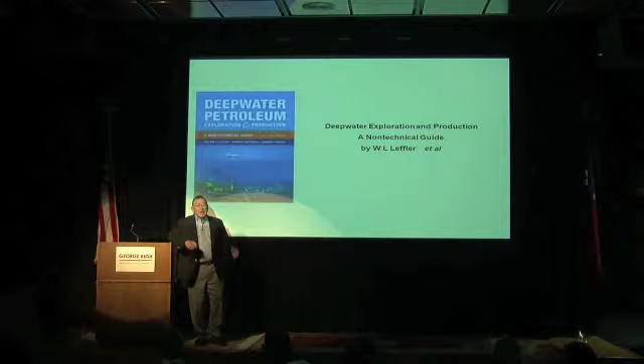I wanted to write a book entitled The Third Wave. So I got two other authors to go along with me, and we wrote the book, published the first edition in about 2002, published the second edition in about 2008, and sent both off in sequence to the publisher. What they did, of course, was change the title to Deep Water Petroleum Exploration and Production, a Non-Technical Guide, by W.L. Leffler et al. Well, Al is not here tonight, so I get to give a talk called The Third Wave. So we're going to be talking about that today.

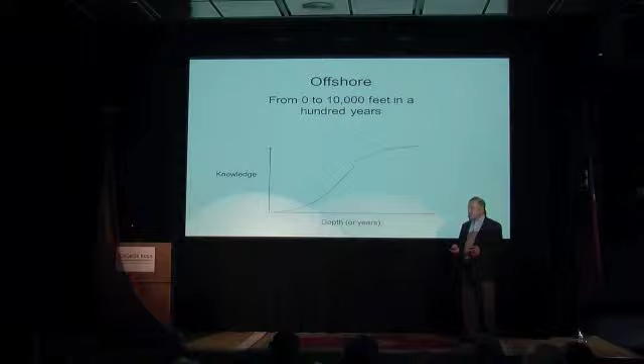But the theme of my talk tonight is going to be the learning curve, because that is the notion that I think describes what has happened as the oil industry went into the offshore. Knowledge on this scale, depth or years on that scale, and like many other learning processes, starts off slow, accelerates, and increases very rapidly. And then you've learned almost everything there is to learn about that subject, and it kind of tapers off. I'll talk to you about where we are on that learning curve in the offshore.

I want to start 100 years ago, a little more than 100 years ago, when the first toe went into the water by an oil man, a fellow named H.L. Williams, who was a spiritualist and sometimes wildcatter in Summerland, California, a town that he founded. He noticed there were oil seeps near the beach, and so he followed those oil seeps all the way down to the water and decided it may be a prospect that he wanted to develop. So he started to build piers out into the water. Some of them went as far as 450 feet out into the water, but it was still only 30 feet deep. And then he would go out and set a casing down there and pound his way down about 450 feet again.

And then he found oil. He did this about 40 or 50 times. The largest of the wells that he was able to produce produced about 75 barrels a day. The average was about 2 barrels a day. After he played that field out, after about 10 years, he decided that was enough, and he walked away from it, leaving all the equipment and oil on the beach because of the equipment leaking and so on. A number of other entrepreneurs did the same thing, maybe 20 or 30 of them further on up the beach. It's no wonder that California doesn't really look all that excited about offshore development in the Pacific Ocean.

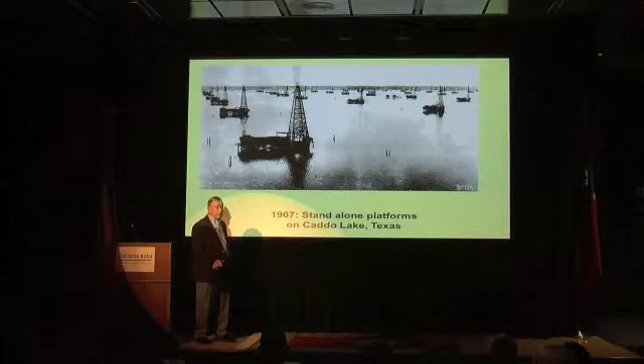He went back to Gulf, back to Mr. Mellon up in Pittsburgh, and said, I think we have a big find. Sure enough, they dragged a whole bunch of equipment up the Mississippi and the Red River and built all these platforms here and produced about 80 million equivalent barrels of oil and gas out of that find. But it was the first time we had a standalone platform in the middle of the water.

I'm going to jump forward about 40 years to 1947, when Superior Oil decided that, after doing some seismic work offshore, they ought to drill an exploratory well in the Gulf of Mexico, about 40 miles out. It was still only about 35 feet deep at that point.

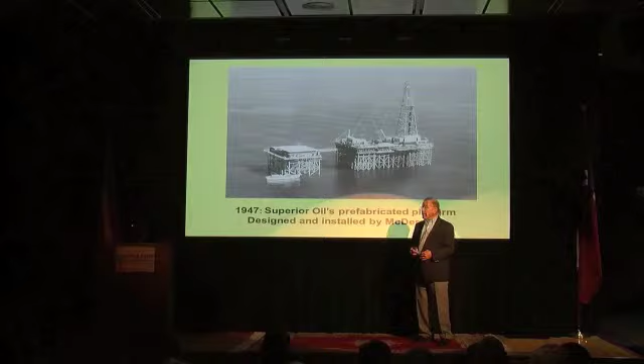But they said, building something out there would not be all that easy to do. Why don't we build this platform onshore and drag it out there, set it down, and drive some piles in to put it in place. That was the first time they built an exploratory well out from a land site.

Unfortunately for them, right down the coast was an operation done by Kerr McGee, and they had a little bit different attitude towards building. They also fabricated something onshore and dragged it out, but it was only about a fifth of the size of the platform that was built here by McDermott for Superior.

What they had was a big tender, which turns out was a surplus LST from World War II. They had all the equipment that they needed to do the drilling over there, and the drilling rig was just on this little tiny platform.

Unfortunately for Superior, this little operation grabbed the brass ring before they did, and they were the first oil produced in the Gulf of Mexico out from a land site. That was in 1947. They beat these guys by about 3 months, but they got the brass ring.

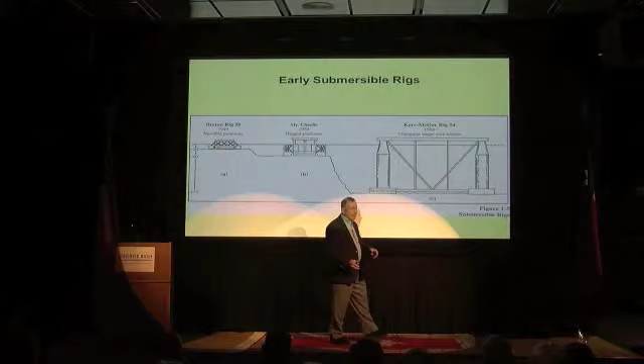When you go to drill an exploratory well, if you build a platform like that, you drill it, and if you find something that's fine, you can produce there. But if you want to drill another exploratory well, you've got to build another platform. So the oil industry thought about that and said, what we need is something where you can pick it up and move it someplace. That's when they started to think about submersibles.

One of the first submersibles that was built was the Breton Rig Number 20 in 1949. What that rig did was have pontoons on the side that were raised up, and this pontoon here was raised up, but you drag it out, and then you would start to ballast those until they actually sat on the ground. As they sat on the ground, you would lift that platform, so the platform was always above the water, and then you would have your drilling rig on top of that. That was the first mobile offshore drilling unit that got put into service.

Mr. Charlie, another one that came a couple of years later, had hinged pontoons on it. The difficulty here was making sure that when it settled down, it didn't tilt and destroy the integrity of all the works that were hinging everything going down. So this pontoon here would hinge all the way up here, and this one would hinge all the way up there.

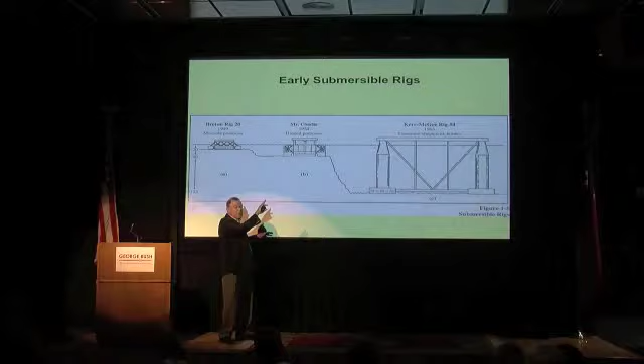And the way they got that on the bottom—here we're talking about 40 feet getting it down—it would be like an old man getting into an automobile. He'd get that part in first, right? So what they would do is lower this pontoon down on a tilt, and when it hit bottom, they'd have leverage to fill up the other pontoon and get that one down too, while the drilling rig stayed on top.

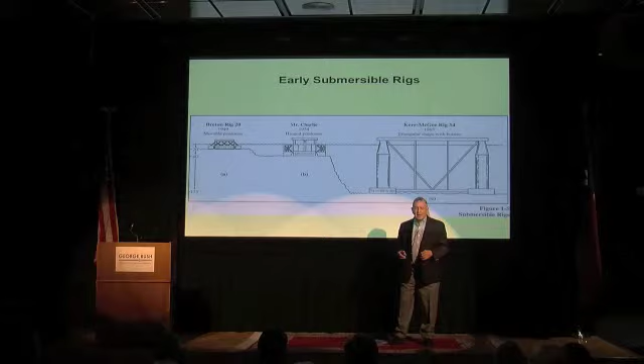It wasn't long before Kerr McGee said, we ought to be able to build something where we could go much deeper than just 40 feet—we need to get into 100 or 150 feet or even more. So Kerr McGee built one of these, a triangular shape with big steel bottles on it. While pulling it to another place, they'd deballast these bottles and everything would float, and that worked just fine. But they were very expensive to build because there's a lot of steel in those things, and difficult to move around, and not all that steady in a rough sea.

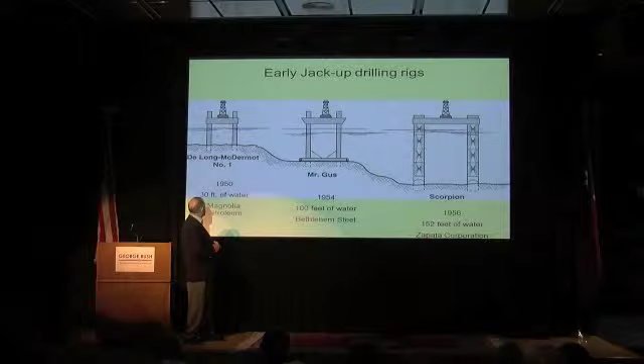So along comes a couple of people talking about maybe we need to not have those big bottles around anymore, but instead get the platform out there and drop something down so we'd have a firm place to do the drilling. DeLong had one built by McDermott, and they could go into 30 feet of water. They had this bottle here, and while pulling it, these bottles were way up in the air like this—they could pull it out and then crank down those big bottles and sit it down there. They'd have a nice stable place to do it.

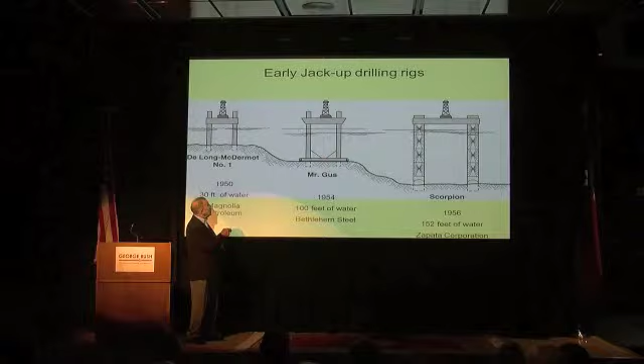So they could actually get into deeper water, as Mr. Gus did—he got into 100 feet of water because this bottle could be dropped way, way down. This actually wasn't a jack up, this was a jack down, because this bottle, while they were floating around, was right up against the platform itself. That one lasted about 2 or 3 years.

On one occasion, as they were dropping that jack down, one of the bottles started to crater, and it tilted over. They took it back and fixed it and brought it out again, and it actually capsized when they got all that stuff in there, and they lost interest in doing jack downs anymore. They said, maybe we ought to stick with jack ups. That's when the Zapata Corporation came along and had a novel rig offered to them by a fellow named...

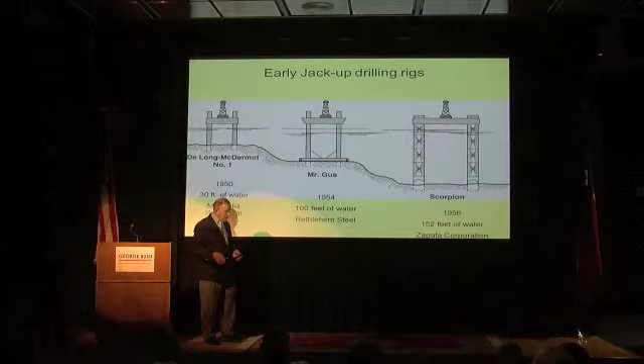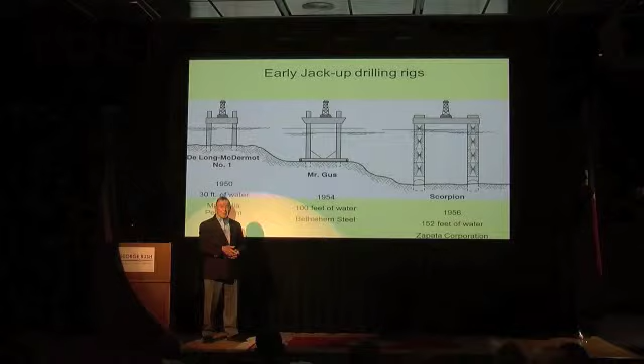Letourneau. That's it, R.G. Letourneau. Letourneau had worked half of a career in the earth-moving business, and he knew a lot about machinery. So what he designed was a rig that didn't have these steel bottles, but had a lattice on it, and you could crank those up and down because they used a rack and pinion kind of operation. Matter of fact, there's a model of one that looks very similar to that somewhere in this building.

They called it the Scorpion, and he started to peddle it around. Couldn't find any of the major oil companies that wanted to use it. But he did find one very aggressive independent called Zapata Corporation, and they said, yeah, we'll try it out. Sure enough, they tried it out, brought it out, and were able to drill in 150 feet of water. Matter of fact, I've got a picture here of the guys who were on that rig.

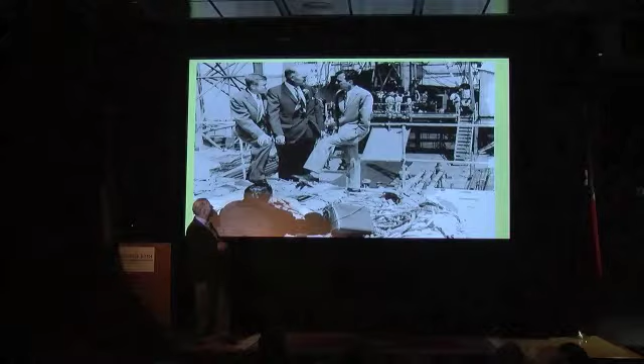One of whom worked for Zapata Corporation—you can tell because of the socks what his name might be—standing there talking to Hugh Liedtke and another one of his buddies.

But these operations—there's the Scorpion right there. You can see the kinds of jack up legs they would put; here they're not in very deep water, so most of the leg is above there and about half of it is down below, so that's probably in about 75 feet of water when they were drilling. They were able to move these things around very rapidly. After finishing one well, they could jack those legs up and move off to another location in just 2 or 3 days, as opposed to building another rig for an exploration well. If they found something, then they would come out and build a platform because they knew they were going to make money there.

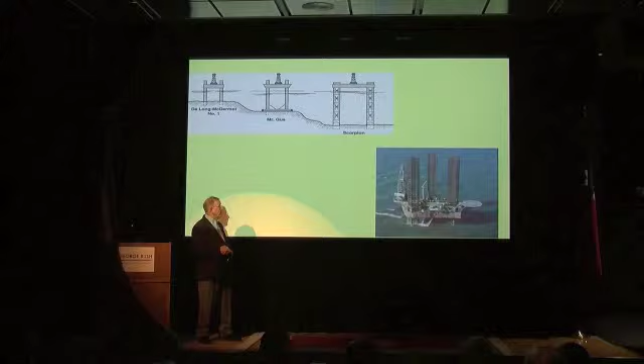These operations here, these submersibles, lasted a long time, but there was a fellow named Bruce Collipp who was riding on one of these submersibles. It was called the Blue Water. And they were towing it from one location to another, and they got into very rough weather.

The captain in charge of towing it said, we're in danger of capsizing because of all the weight we have at the water level. I think what I'll do while we're towing it is submerge this thing a little bit. It'll be a much slower tow, but it'll provide us some stability. Bruce Collipp, probably the only marine engineer or naval architect working in the oil industry at the time, happened to be on board.

He noticed that when he dropped that thing down into the water and was still towing it, it got very stable. And he said to himself, I've got an idea. The problem with these rigs is that they get unstable when you're moving them around, but if you just drop these bottles down, maybe we can do something with that.

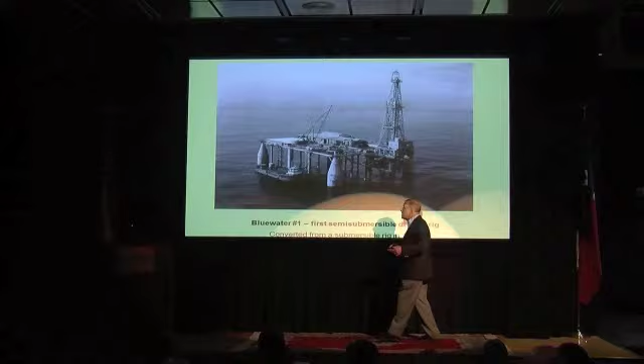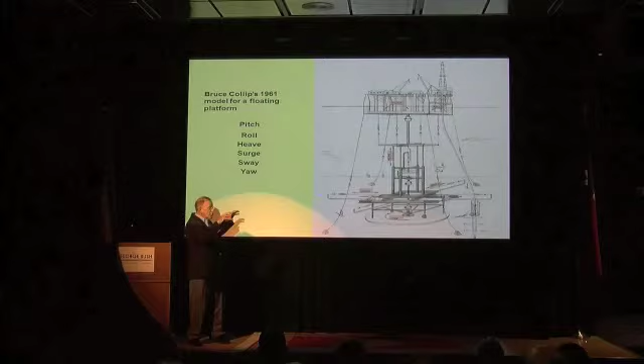He said you can eliminate almost all of that if you just drop those pontoons way down, about halfway down would do it. When he went to the Coast Guard to get a license for this thing they did with the Blue Water when they converted it, the commandant in New Orleans said, well, what do you call this thing? He said, well, I don't want to call it an ocean-going vessel because that means we have the Jones Act and all that sort of stuff. I don't know what to call it because we only submerge it about halfway down. So the commandant said, oh, it's not a submersible? He said, no, it's only a semi-submersible. The guy wrote down semi-submersible, and a new class of drilling rigs was born.

Of course, we have gone a long way from that. Instead of having all these tethers keeping these things in place so you can do the drilling, now we have something like the Nautilus, and you do it all by GPS positioning with jets along the side, so the GPS directs the jets which way to push the thing back and forth so you're only moving a couple of feet in each direction while drilling. So again, there was another innovation that moved the industry along and got us drilling not in 100 feet or 175 feet, but now we're able to drill in 200, 300, and 400 feet.

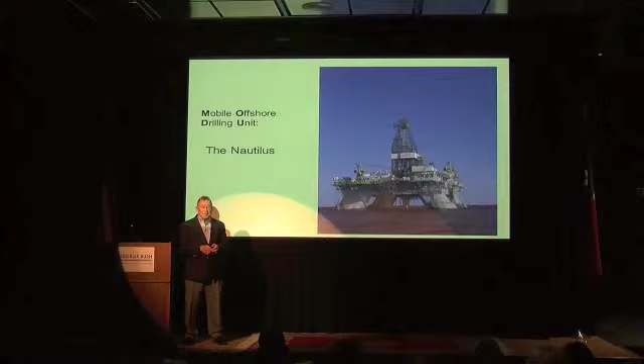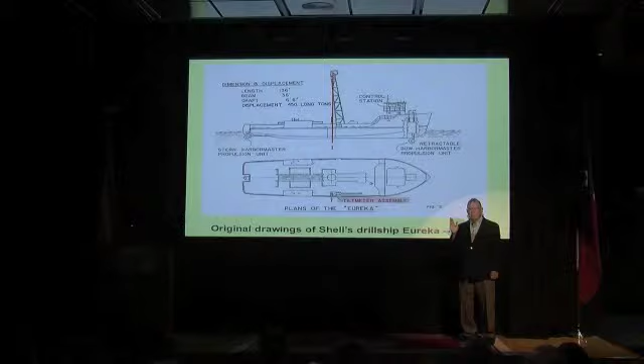Another innovation that came along about that time, after a couple of false starts, was something called the Eureka. It was a drill ship. And you say, well, how do you keep a drill ship on point? You could tether that down as well, but the designers of the Eureka said we're going to put some kind of apparatus on there called a tilt meter. That tilt meter went from the top of that rig all the way down to where we were drilling, with a sensitive directional indicator so that when the ship moved in one direction, the guys on board ship would be able to tell you to move in the other direction.

Well, how do they go about doing that? They had a retractable Harbor Master propulsion unit up in the front, which they operated with a joystick, and it could move back and forth. Then they had the stern Harbor Master propulsion unit, and they could move it forward and back.

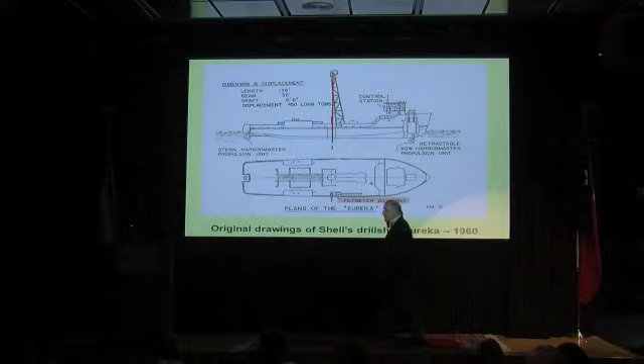That worked for about a year until they found out that it wore out both the joystick and the forward propulsion unit, so they had to say we need a little better kind of operation than that. That was the first drill ship, though it didn't drill any exploration wells, but it did drill a lot of coring wells where they would get down and find out what is within the subsurface.

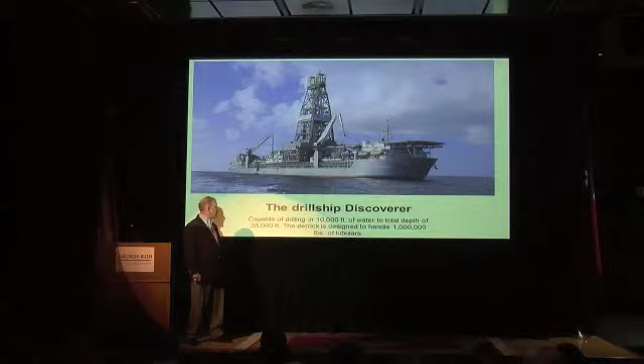Now, of course, we have the drill ship Discoverer, capable of drilling in 10,000 feet of water to a depth of 35,000 feet. You've got this huge derrick on top designed to handle the kind of tubulars you need to get down to 35,000 feet, so it has to be able to pull 1,000,000 pounds out of that well.

This, of course, is also done by GPS positioning and side thrusters all along both sides of that ship. So we started small and learned our way into how to deal with drilling ships.

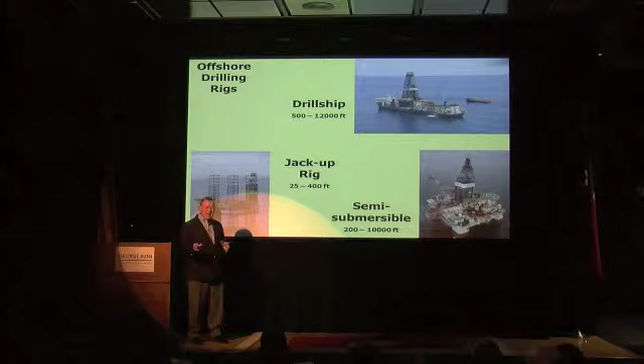If you look at what we're doing today, a drill ship can drill anywhere from 500 to 12,000 feet. It's hard if you get less than 500 feet because the ship will move a little bit and you don't have much give in the line going down. But when you're drilling in 12,000 feet, you start drilling up here and turn it around about 4 or 5 times before the bottom starts to move. That's 12,000 feet of pipe, and there's a lot of torque that has to be taken up before you actually start turning. Jack-up rigs really peaked out at about 400 feet, and semi-submersibles are used anywhere from 200 to 10,000 feet in today's commerce.

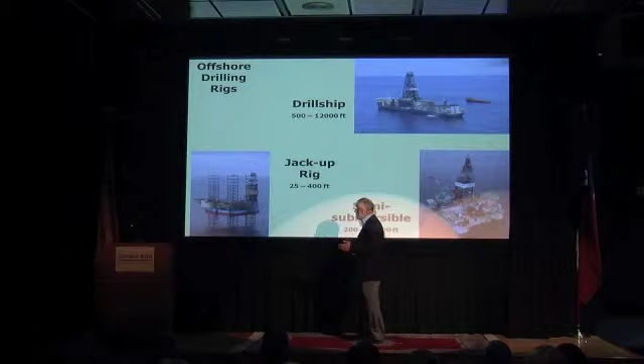Okay, so those are all exploration kinds of operations. You're going out there to find out where the oil is. And having found something, what do you do? You've got to put a production system in place. You don't want to use a drill ship to do any production, and you don't want to use a semi-submersible either, although some people have done that once in a while. What you want is a permanent place where you can produce for about 10 to 20 years.

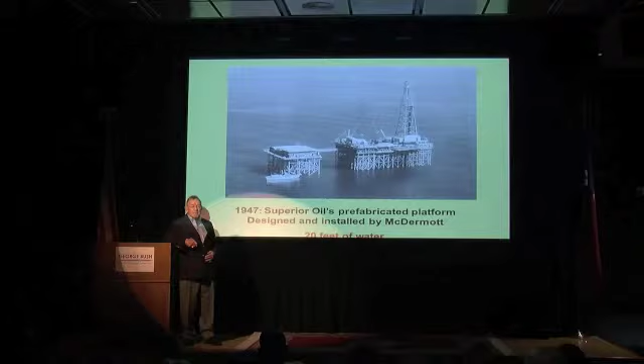So you want to design something to put in place. That one, which was an exploration well, turned out to be also the production facility because it was there.

But I want to jump forward from 1947 again, where we started to get into deeper and deeper water. Here we are in 1,000 feet of water when Shell put the Cognac platform in place. As we go forward, year by year, we're getting into deeper and deeper water by putting these very large platforms in place.

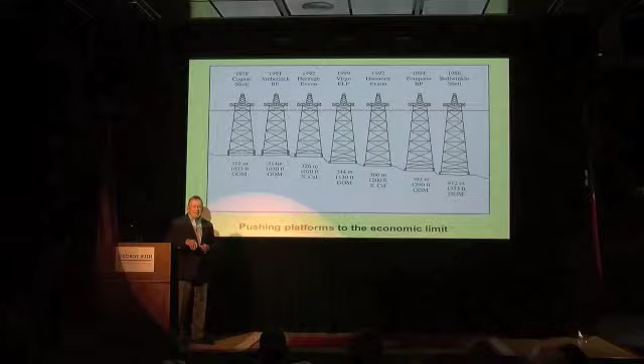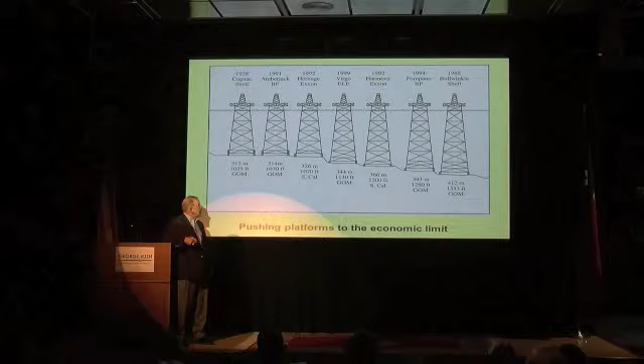It's hard to appreciate how much steel goes into a platform like that. In 1,353 feet of water, you're putting a platform in place that'll support a drilling rig and all of its complementary equipment on board. But you get some sense of that when you see it, since this was fabricated onshore and dragged out there.

So when you drag that out there, what do you do with it when you get it onto the site where you have discovered something? Well, you've got to get it out there, and you've got to get it right on top of those wells that you have already drilled.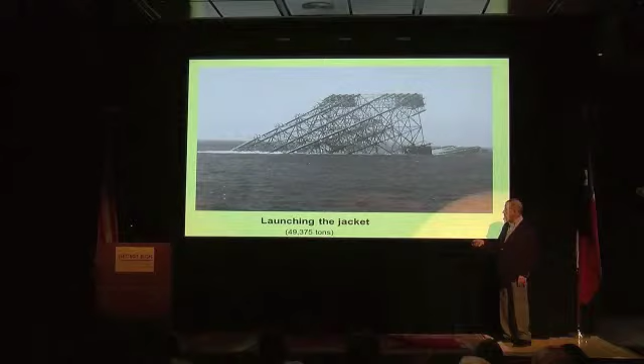At least you hope it will. And then you move it around and position it so that, oh, and there you are, you're floating 49,000 tons of material.

And so you take that barge out, and you slip it off the barge, and then it's floating, and then you start to ballast those tubes that are on there very carefully, so that the bottom will start to move in that direction, and if you do it exactly right, it'll settle down right on the seafloor on those pads that you've already put down there so that it'll sit there.

Now, 49,000 tons, you say, well, it's going to sit there forever, but of course, the hurricanes come in, it may not sit there forever. So what you do is you put steel pilings in there that go down.

150, 200 feet. You drive those down through those legs there, right? So you may call that a platform, but generally in the industry, they call those jackets.

Now, why would you call something like that a jacket? Well, the jacket is one where you have the equivalent of a zipper or a button, where you're driving those piles way, way down there, okay?

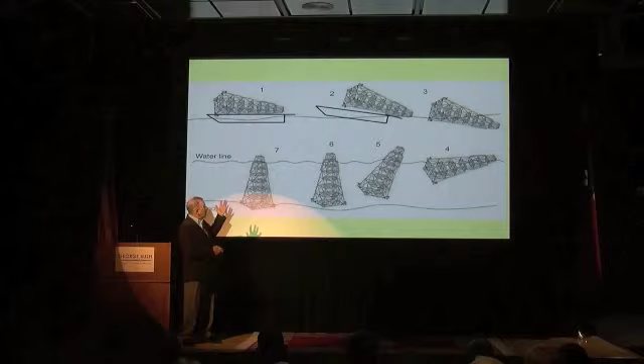So now you have the jacket in place, but nothing on top. So now you have to construct the top sides, and you construct them on a little rail line so that you can run them out onto that barge.

And the top sides themselves, 2,000 tons. And so you got to drag that out to the platform, to the jacket, and then you have to have a really large crane, to be able to pick it up and set it down right on top of the jacket.

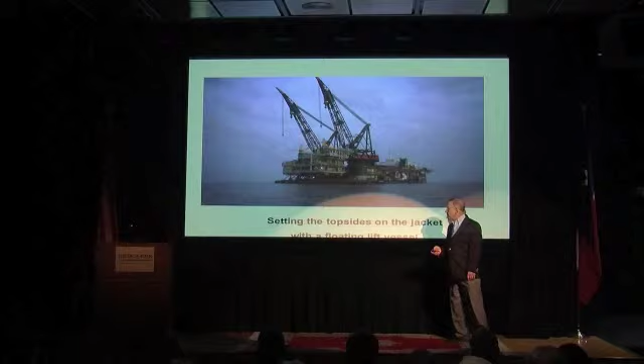And when you're all done, the Bullwinkle looked like that, mated with the top sides and all the equipment that's on there. So all the equipment was brought out in one piece and just set on there and welded in place.

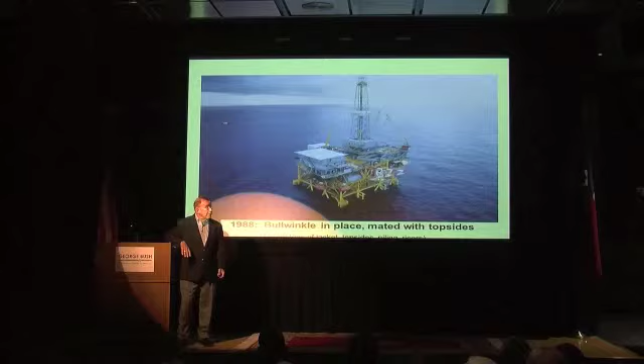Now, when Bullwinkle was put in place, there were a number of other exploration finds a little bit further out. Here's a profile of what the onshore and the offshore and the deep water and what they call the abyssal plain look like, way out there, where you get beyond 12,000 feet of water. And here's the Bullwinkle at 1,353 feet, and here are discoveries along here and here and here and here.

The bottom of Bullwinkle was 400 square feet, 400 feet square, 160,000 square feet, but 400. And the thought of putting another platform here in, say, 2,000 feet of water was more than anybody really wanted to take on. Just too much steel to make it really commercial.

And so, what are we going to do about that? There was a mechanical challenge.

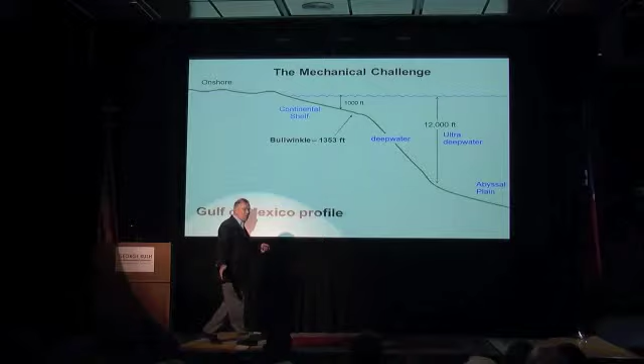You know, the difference between exploration and production people is profound. The exploration people, I always like to think of them as having a real big bulge on their right brain, and the production people having a real big bulge on their left brain.

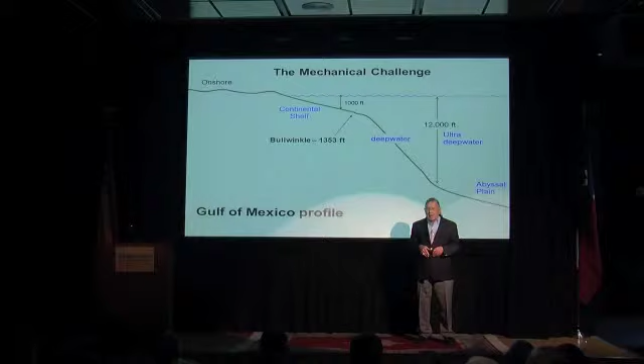So when the exploration people go out, they say, we'll go out to where we think it's hard to find oil, but we know how to find it. And they say, well, how are we going to produce it? They'll figure it out, don't worry about it. So you have this brain going, oh, and this brain going, don't worry about it.

So having found all these deposits, large reservoirs out here beyond 1,300 feet, the production people had to start thinking about how are we going to be able to do that. So they had to come up with something besides platforms where you hold the platform up.

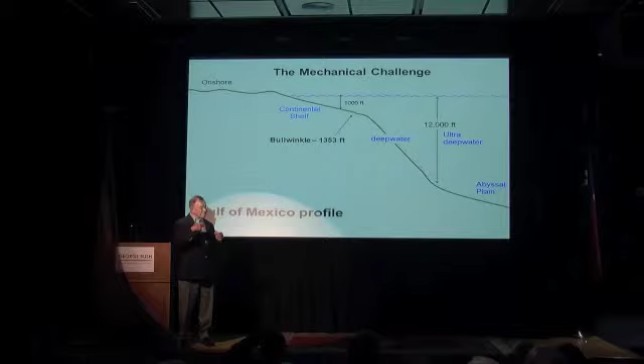More innovation required. The geologic challenge at the same time for this deep water kind of stuff, the conventional wisdom in 1984, and this is a quote from one of the exploration guys at Shell, was that there is no sand beyond the shelf. 100 wells have penetrated the bathyal section and found no sand.

But there were a couple of explorers out there who said, you know, I think we can probably find something big enough to make it commercial. So there was skepticism about whether or not it was commercial because nobody tried to produce it, and there was skepticism because nobody knew how to produce it. So they had to work together between exploration and production.

At this point, I think of this as being the end of the second wave. Well, what do I mean, the second wave? The first wave was the onshore wave.

It started way back about 1,000 years ago, where people were picking seeps of oil out of the ground, and the Chinese were piping gas leaks into the palaces to light. But really, it kind of started in 1859 when Drake drilled the first oil well in Titusville, Pennsylvania, and kicked off the oil age.

There was a lot of learning going on after that, and by 1915, they were using rotary rigs and diamond bits and perfected drilling mud and did geologic surveys, and even started doing seismic back here in the 1930s. But by about 1940, much of what was to be learned on the onshore had been learned.

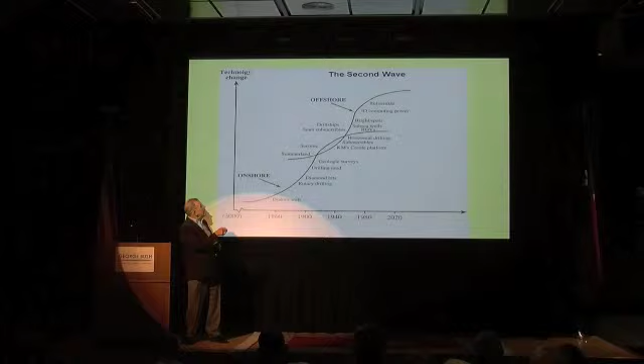But the second wave was just starting back here in Summerland, and then Kerr-McGee's Creole platform, and then they started using submersibles and then semi-submersibles and drill ships and subsea wells, and they were using bright spots and seismic and 3D computing and Bullwinkle. But by the time they got to Bullwinkle, that second wave, they were kind of worried about whether or not that was the end of the second wave.

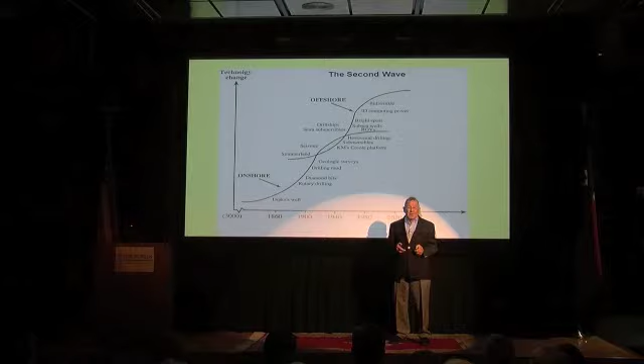In addition to that, in the Gulf of Mexico, they weren't finding very much on the shelf. The amount of discoveries was not as much, about the same as the amount of production, and so the reserves were just kind of flattening out. And people were worried about whether or not there was much more in the Gulf of Mexico, and they started calling it the Dead Sea.

And so the explorers kept saying, yeah, but we think there's a lot of stuff out there in the deep water. And the production guys said, we got to think about that for a while, because we don't have the technology yet to be able to go in beyond 1,353 feet.

So the keys to the profitability of the deep water in the Gulf of Mexico and other offshores, there were about 4 things that were taking place. The nature of the reservoirs.

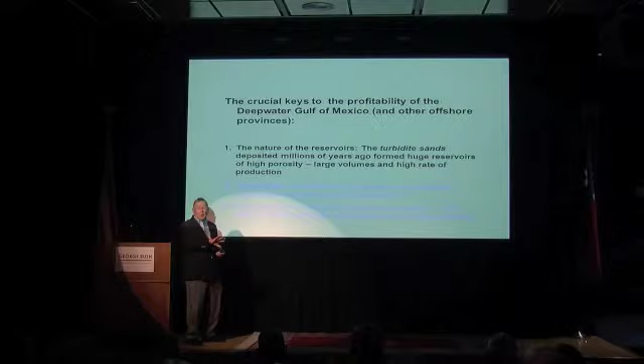Turns out that people started to understand what happened when all of that sediment came down from the ancient rivers into the offshore, that it actually made its way out into the deep water. Nobody thought that when that sediment went out there, that there was any organic material in there that would eventually transform into oil and gas.

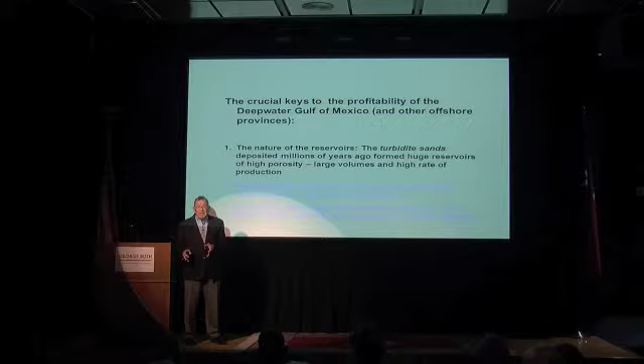But 1 or 2 companies, Shell might have been one of them, took the chance that these turbidite sands that were covered over with millions of years of sediment on top of them, and they were down 30,000 feet, might have very prolific reservoirs down there. And so they put a platform out there and tested it and found out that those turbidite sands were very prolific.

You can see the sediment coming down, of course, and in case you don't talk to the same guys I talk to: it all comes down these rivers and comes off into the delta, and a lot of that really fine sand made it down to the slope where the deep water is.

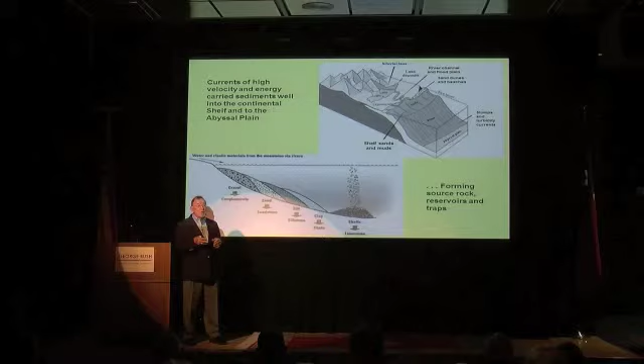And dragging with it copious amounts of organic material, and besides that, there was plenty of organic material that was dropping along with these sands out of the water. So there were huge reservoirs out there eventually demonstrated, and they were very easy to produce once you were able to get something on top of them that was able to tap them.

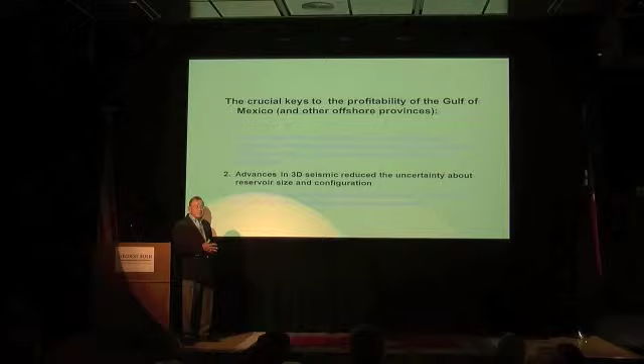The second thing, advances in 3D seismic reduced the uncertainty about the reservoir size and configuration. Seismic started in a very modest way. After World War I, where they were using seismic to figure out where people's artillery was on both sides of the line, then a lot of those people, and one of them was named, what was his name again? Schlumberger. You remember that name. Came over and started developing seismic for understanding what is in the subsurface.

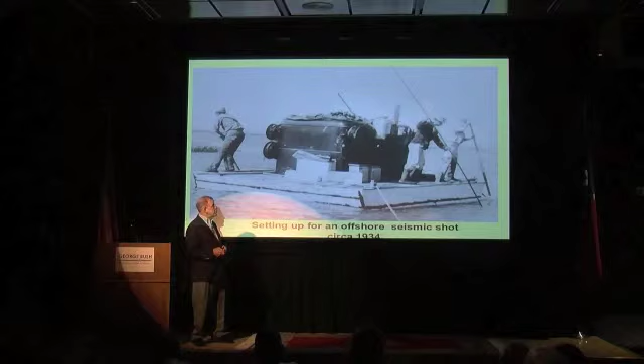Started off very modest. Here's the offshore seismic operation around 1934. And of course, what they had to do is to lay these phones out in the water, piece by piece by piece by piece, and then they would capture the sound after they lit a couple of sticks of dynamite and threw them over. And what would happen is that the dynamite would explode and send sound waves down, and those phones would pick up the echoes as it came back, and then they were able to draw things like this.

Well, seismic, it was a 2D seismic record. And we used those for decades, 2D seismic records, until Exxon came along and said, we've tried to figure out whether or not we can do 3D seismic records. Instead of just running a line down here, we run a line here, a line here, a line here, and then see if we can make sense of all those individual lines.

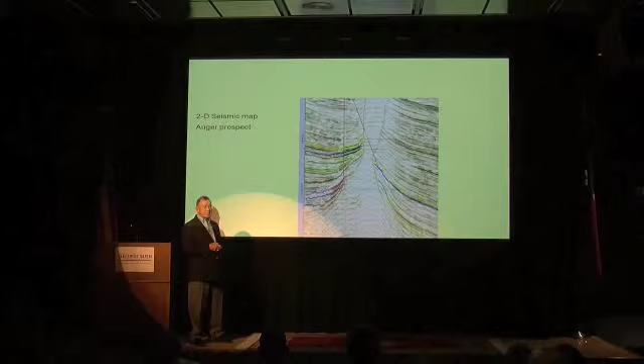Well, that's a 2D version of it. And now, of course, we're able to do a 3D version of it because we have 3D seismic vessels. And what those seismic vessels would do would be to drag multiple lines behind them. You can see them out there. They might go for about 3 miles.

And then, of course, they didn't throw dynamite over anymore because, you know, nobody would really like to see all those dead fish float up to the surface. But what they use now is a more benign way of sending off a signal. They have a big air gun, and it's like popping a balloon. Boom! And that would send a signal down, and those signals would bounce off all the layers underneath, and you'd be able to draw 3D

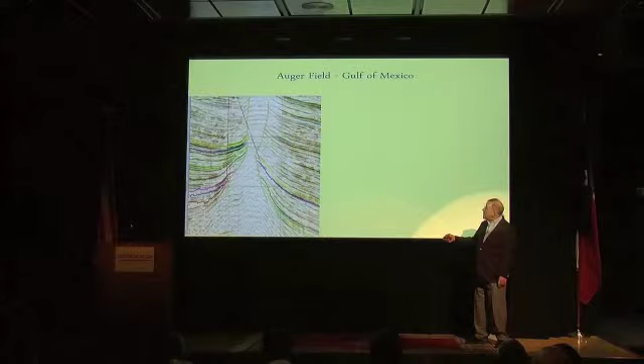operation. Now, here was a visualization room where disciplines, there would be geologists and geophysicists and physicists, and there'd be petroleum engineers, and they would all gather in the rooms. You can see this is 1998 because this guy's wearing a suit. This guy's got a tie on, so it must be 1998, right? But they would all be looking at this kind of stuff, and eventually they would take this kind of thing

And be able to transform it into something that looks like this in 3D. And here you see that big pillar of salt, and you can see the wells that have already been drilled, and they actually found something on the other side of that pillar of salt and were able to directionally drill down into that formation down there and produce additional oil and gas.

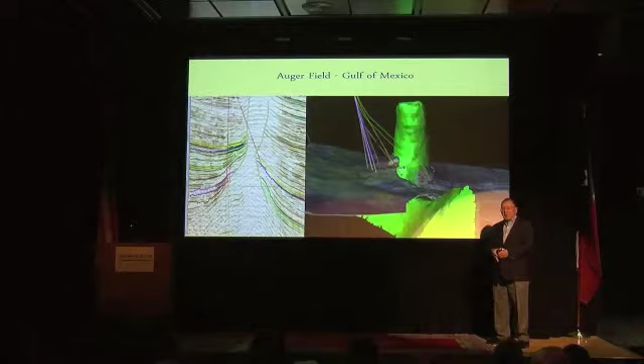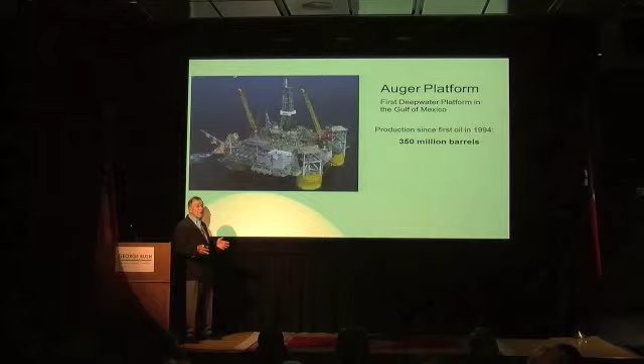So they started off very modestly, you know, with throwing the dynamite over and capturing it on those hydrophones that they had planted by hand, until now we're at 3D seismic by having those seismic vessels. That Auger platform that they thought, you know, might have something there, they were able to produce first oil in 1994, and since then they have produced 350 million barrels of oil from that thing, from those rudimentary kinds of 3D. And now they're going back and looking at all of these fields with rudimentary 2D, and now they're going back and looking at 3D and redeveloping many of those fields that are out in the Gulf.

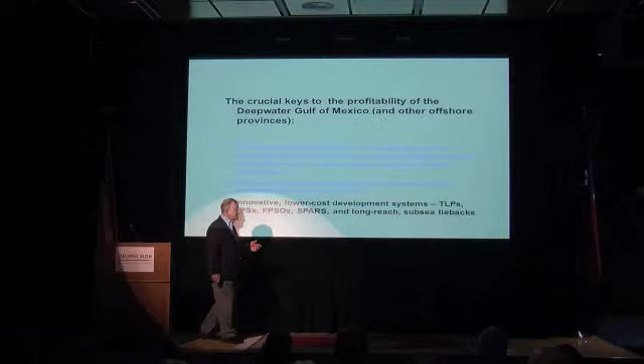Finally, what made the Gulf of Mexico was the innovative low-cost development systems. Tension leg platforms, floating production systems, floating production, storage and offloading ships, spars, and long-reach subsea tiebacks. What is all that stuff? Well, I'll tell you what all that stuff is, in case you were wondering.

Tension leg platforms. Rather than to try to put a platform on there and put a jacket down there and put a platform on top with the jacket holding it up, so we can't do that anymore. What we need to do is to have a floating platform being held down. And so you have something called a tension leg platform.

There is the platform up there. It's got some tubes up there, pontoons that are semi-filled, like a semi-submersible. And then they have these tendons that are attached to big anchor piles down at the floor of the ocean. And so that will stay in place. It will move back and forth. Not very much, but it will move back and forth. But if this is in 4,000 or 8,000 feet of water, that pipe will move with it. There's a lot of give in that pipe in 4,000 feet. You can move quite a bit.

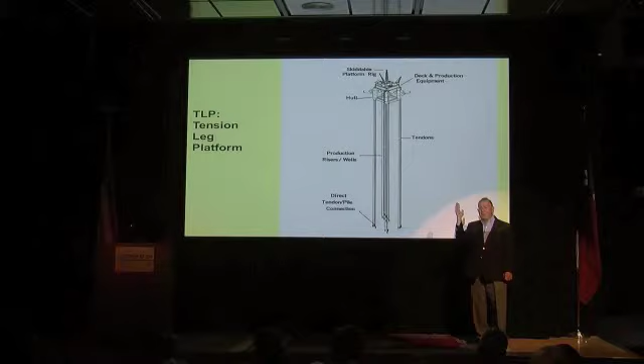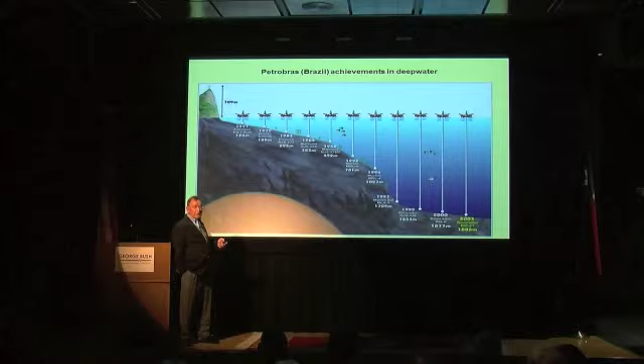In the meantime, besides the Gulf of Mexico, the Americans can't take a victory lap without tipping their hat to what was going on in Brazil at the same time, because Petrobras had discovered oil there considerably earlier, in 1977, in 300 feet of water, and they put a floater there. Successively they started finding oil in deeper and deeper water. So Petrobras, in parallel to what was going on in the United States, was drilling deeper and putting floaters on, some tension leg platforms, some floating production, storage and offloading vessels. We'll see those in a moment, so you can see the scope of that.

There's, what's the name of that mountain down there in Brazil? Yeah, that's the one, right. Whatever he said, that's what it is.

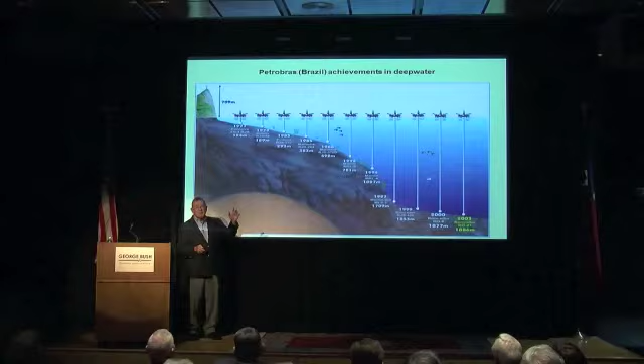So we were off the subject of Brazil, and we were talking about tension leg platforms. The U.S. learned from Brazil, Brazil learned from the U.S., but the first big tension leg platform was the Auger platform, the one I told you was producing a lot. It's also called the tension leg platform that ate New Orleans, because that's the platform superimposed on New Orleans, to give you some sense of the scope of these kinds of things.

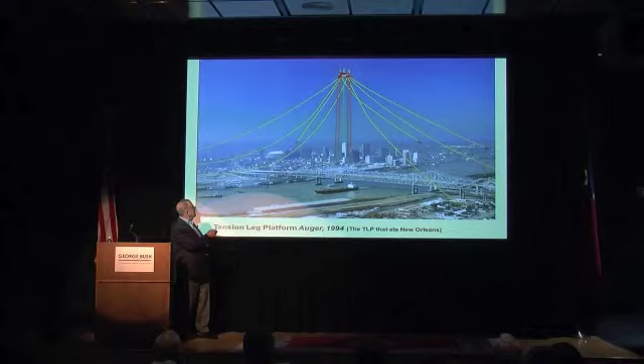Shell was so nervous about whether or not that thing would stay in place that they ran tethers all the way out two miles this way and two miles in every direction to hold it in place. But it turns out they learned they didn't need to do that, because these lines down into the suction piles in the seafloor held it just fine. So subsequent TLPs put in the Gulf of Mexico don't have those yellow lines, they just have the red lines. You can see the riser, in which the wells are coming up, going up to that platform. Then when it gets to the platform, the oil and gas are treated, and then they go down a pipeline onshore.

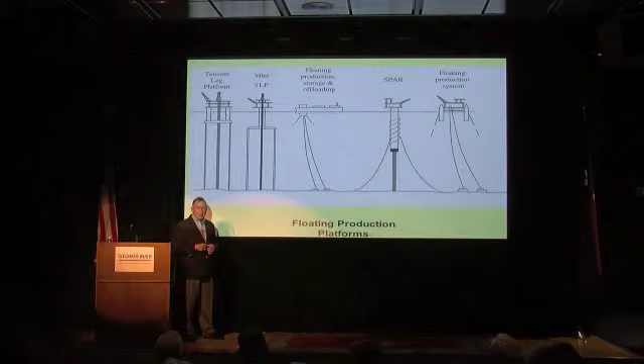If you aren't in a position to pipeline the stuff from the platform onshore, or you're in an area of some unfriendly country and don't want to bring it onshore, you might use a floating production, storage and offloading ship. There you have all the valves, the Christmas trees, called wet trees, that control the well on the floor of the sea. They're controlled from up here by electrical and hydraulic lines run down there, so you're not controlling the valves up here, you're controlling the production down there remotely.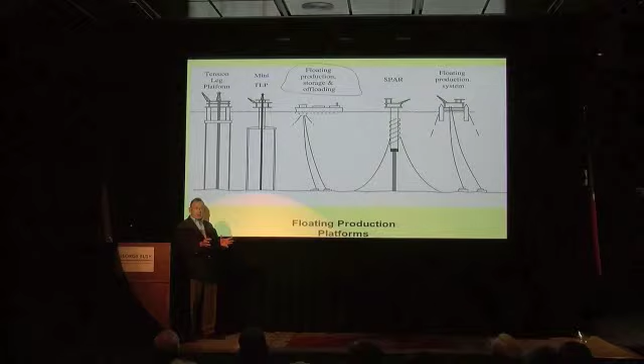There's a picture of one in the North Sea, the Anasuria. The way those things work is you have a rotating facility up here, so when the wind blows the other way, the ship rotates right around so that this part is always connected down here. It's on a big swivel, and the wind can blow the ship all the way around. The operation is that there's a big storage facility, and the largest and newest of these ships can hold up to 2 million barrels of oil as they're pumping it out of the ground. Every day or two, a lightering ship will come along and unload the oil, bringing it to some place friendly to unload it.

Oh, and there's the reasons — I forgot that I use this one when I teach at the University of Houston. You have to show them as well as tell them, otherwise they won't remember.

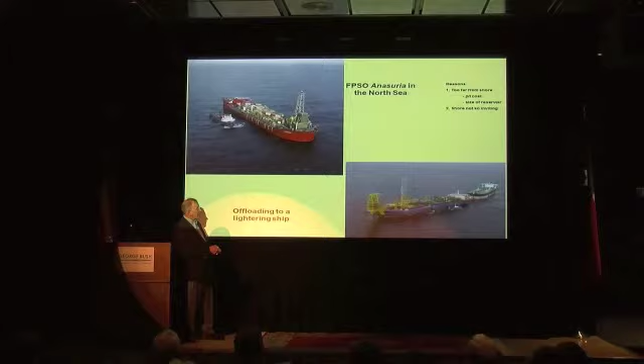Okay, so there's another one with the swivel that hangs off the end. It does the same kind of thing. And there's a lightering ship that's unloading that ship from the oil that is already produced.

So these are techniques to make subsea wells in deep water commercial, so that you can produce most of the stuff that's in that reservoir down there, another 35,000 feet.

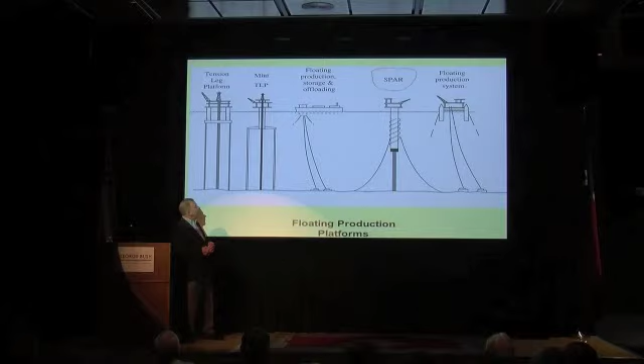Let's see, what do we have here? Oh, spars. What is a spar? A spar is something like that, a big, big tube. Again, there's that little hotel out there. They go build this big tube and bring it out and set it down. Now, why do you do that? Because it's a different way of providing the stability for putting a platform in place.

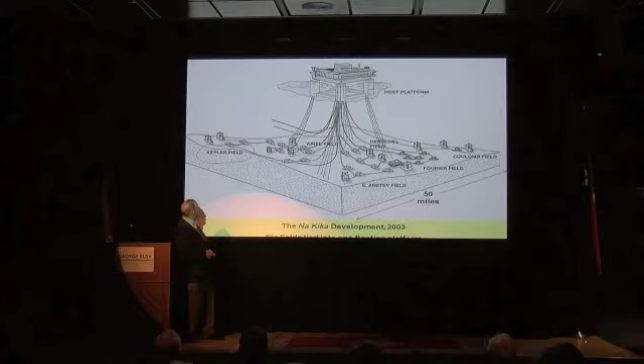And then there are floating production systems. Here's one called the Na Kika. Each of these fields here, there are 6 fields. Let's see, 1, 2, 3, 4, 5, 6 fields. None of them was big enough to warrant putting a production facility on top of it. Fortunately, they were all natural gas, and so when we produced those with subsea development, this is a 50-mile by about 70-mile area, so 3,500 square miles of stuff.

That gas was high enough pressure that it could all go to this single host platform and be processed there and then pumped onshore. So these wells are somewhere between 30 and 50 miles away from the host platform, and they're all connected by electrical and hydraulic systems, so you can control all those valves.

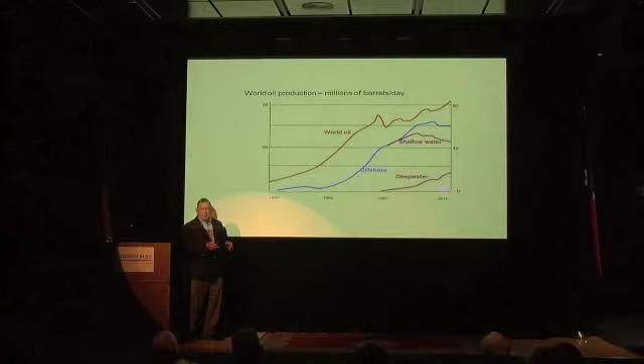I'm getting towards the end, okay. You can see what the history of oil production in the world is. World oil production, wiggling along here. Offshore production, really increasing to maybe 55% of the total world oil production. But starting at about 1980, the shallow water, like the stuff that we had been producing in the Gulf of Mexico, started to taper off, but the deep water has been increasing. And so you can see the wiggle that goes on there to sustain offshore production.

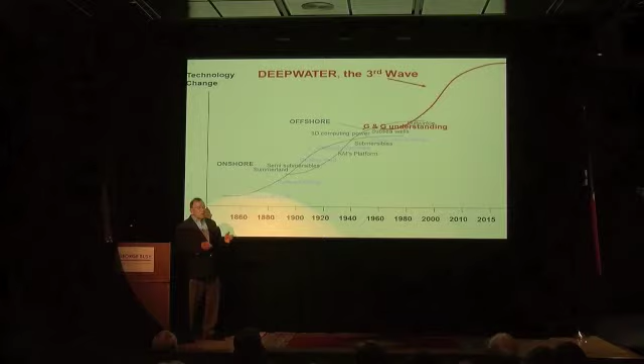Oh, it even gets bigger, okay. That's why I call it the third wave. Because it's not the stuff that you did here, or the stuff that you did here. What we have is better geological and geophysical understanding of the deep water, which is very different in many places than the more shallow water. We have the innovative facilities, the tension leg platforms, the floating production, storage and offloading operations, and the spars, and the heavy lift vessels, which were key to being able to do those things economically.

And we have subsea processing, and we have riser technology, which I didn't show you much about, but that's what gets the stuff all the way up to the top. And who knows what's coming? Who knows when that curve is going to bend over? But that's why I say we're in the middle of the third wave, somewhere along here, and I don't know when it's going to bend over, but that's my story.

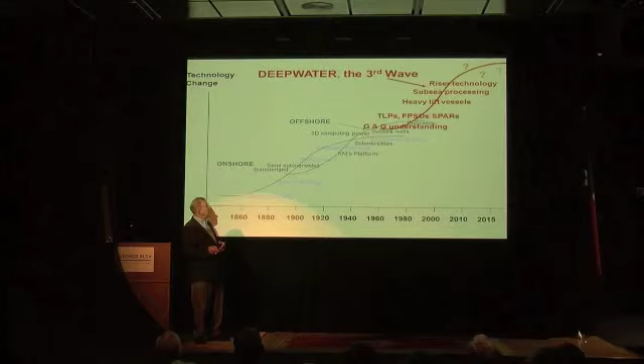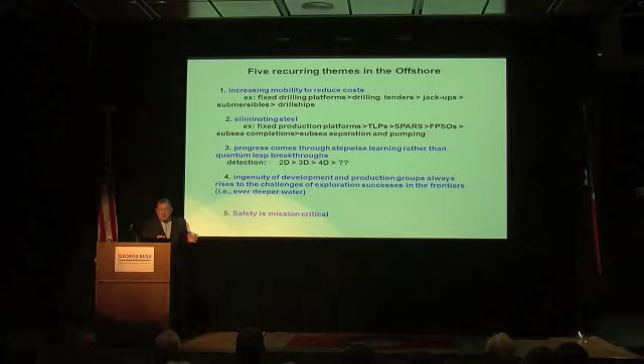Five recurring themes in the offshore. First, increasing mobility to reduce costs. Fixed drilling platforms is what we started with. We went to drilling tenders, jackups, submersibles, semi-submersibles, and now we're into drill ships - all improvements in technology. A lot of it manifests in eliminating steel. Fixed platforms go to TLPs, spars, and FPSOs, subsea completions, and subsea separation and pumping, in order to reduce the amount of steel you have to put in place to produce these things.

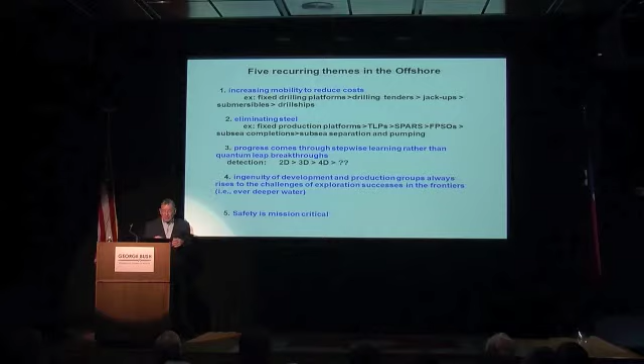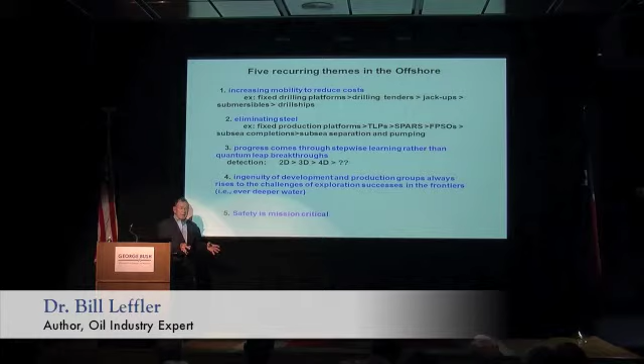Another theme: progress comes through stepwise learning rather than quantum leap breakthroughs. We went from torsion balances, going out there trying to figure out where the oil was, and then we got into seismic - 2D and then 3D. They even got 4D out there, so they can look at something this year, and in 5 years look at it again to find out what has been drained and what hasn't, and go redevelop those fields. So they can add the element of time to the 3D data.

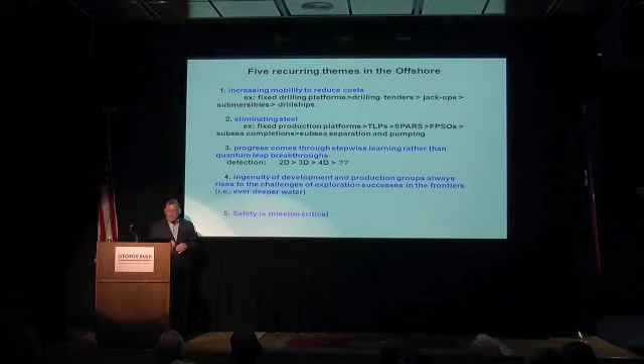We also found that the ingenuity of development and production groups always rises to the challenges of the exploration successes in the frontiers. The exploration guys will just go look for it wherever they think it is - it's like following the money, right? And production guys have risen to the challenge, going into ever deeper water. And finally, safety is mission critical, as we could all guess at this point. And I'm done - I thank you for your attention.

Despite our interruptions, I have time for one more question. I can't see you, so you'll have to shout it out because I've got this bright light in my eyes. I'll take care of that. Okay, there's two questions in the back. I'll take them both. So if we get a whole bunch of light crude, what do you think about exporting crude out of the United States?

We went through a long period where we had a lot of crude in the United States and we were exporting it. I don't see any reason why we shouldn't have free trade. South Texas is awash in crude oil right now - we have more crude oil than we know what to do with, and the prices dropped below world prices. Does that sound like the kind of free trade and free economy we ought to have? It doesn't sound like it to me. So I'd say there's going to be a lot of pressure, and maybe some success, on being able to export crude. We can export products. So you say, well if you can export products, why can't you export crude? Well, we've got to protect the refining industry - they're all right, don't worry about them.

When they build those tethers and put them down in the ground, is that all done remotely? They don't have to go down there? No, they don't have to go down there - it's all done remotely. They've got wonderful remote operated vehicles now. They all look like R2-D2, but there are guys on the ships with joysticks running those things down there, and they drive those suction piles into the ground with remote operated machinery. Divers can go down 200, 300, 400 feet, but when they come back up they have to sit in a tank for about 3 days to decompress, so they don't like to send them down 12,000 feet.